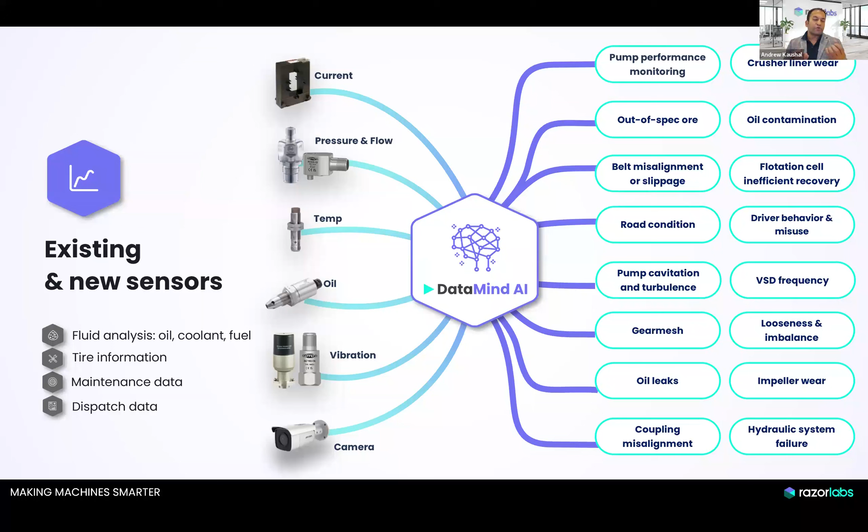Sure. So we can give an example of a mill to start with. The mill is obviously critical in many operations, from gold to copper and other precious metals.

Going through this, you can see here one of the screens of the system. The mill is such a huge machine that when you're in a long shutdown, you need to slowly rotate it. You can see here one of the severity scores the system is giving specifically to the motor of the mill, and you can see the different components.

You can see here that after a while, they had a long shutdown on site, about a month and a half. Unfortunately, during this shutdown, they forgot to rotate the mill, and the weight of the mill caused damage to the bearings. These black dots are when the mill was down. When it went back into operation, you can see it already started orange, quickly deteriorating to red.

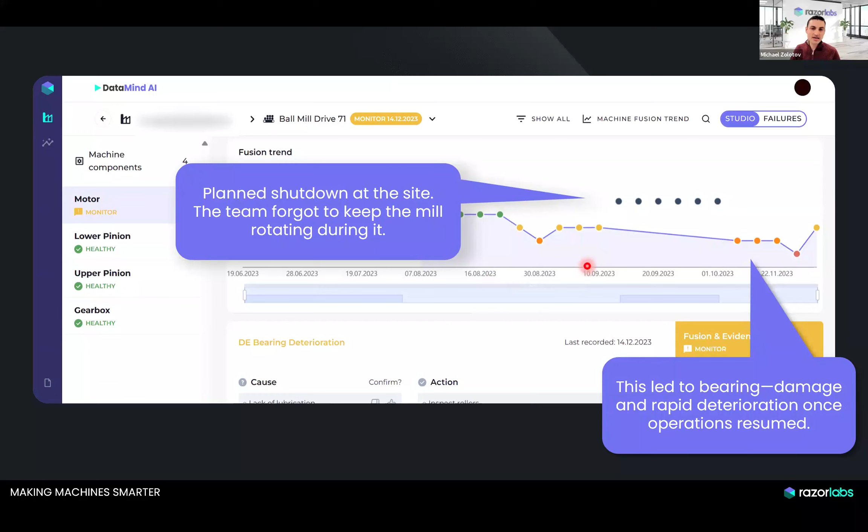So the team had real-time indication that something was wrong right after the shutdown, and it was actually deteriorating. Now, it's not a black box. It's not only giving the exact diagnosis of the DE bearing deterioration, with the causes and the action, but it's actually showing the reliability team on site what the evidence is.

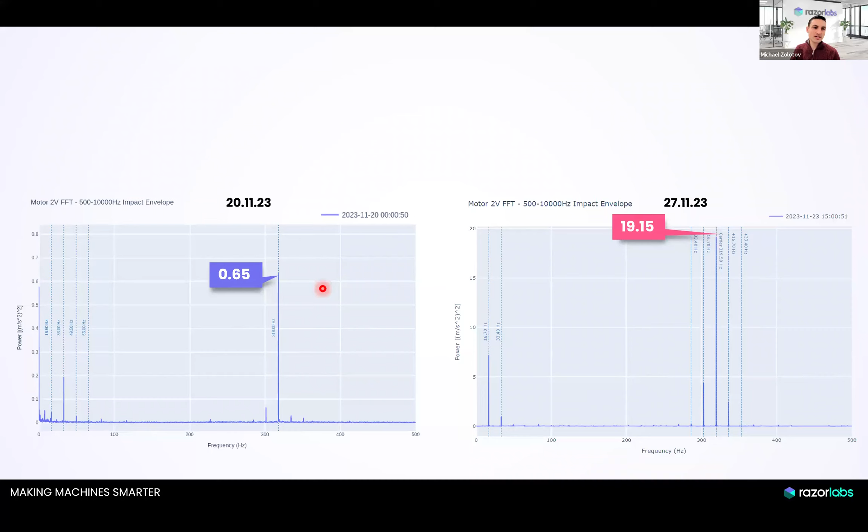It shows that within one week, roughly a year ago, they had a deterioration of 40 times in a specific frequency. This is a very apparent deterioration in a specific frequency that indicates specifically the outer race deterioration of that bearing. The team on site, understanding this is a very large machine, wanted to be sure.

So they sent their own team to do regular vibration analysis, and this is the signal that their own team got. You can see immediately the difference between our signal, which is the fusion of vibration, motor current, tachometer and other sensors, versus just a regular single sensor vibration reading in this case.

When you try to compare the blue to the red, trying to understand if it deteriorated, these are also one week apart. You don't see any deterioration here, right? Sometimes the blue is higher, sometimes the red is higher. You don't see any deterioration. Obviously it's not as clear as the super clear signal you get when fusing sensors together.

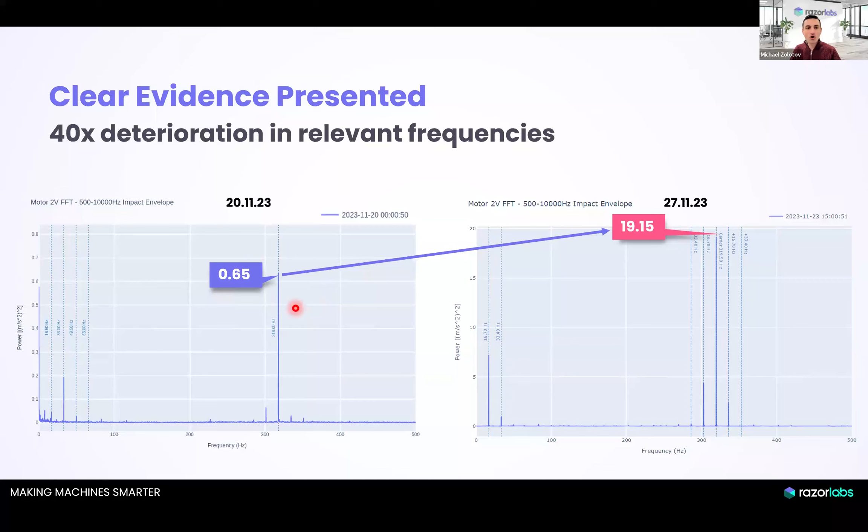So here we fused vibration sensors together with motor current and tachometer, all with sophisticated algorithms we're going to discuss. Basically, they didn't see anything with a single vibration sensor, and they took our word for it.

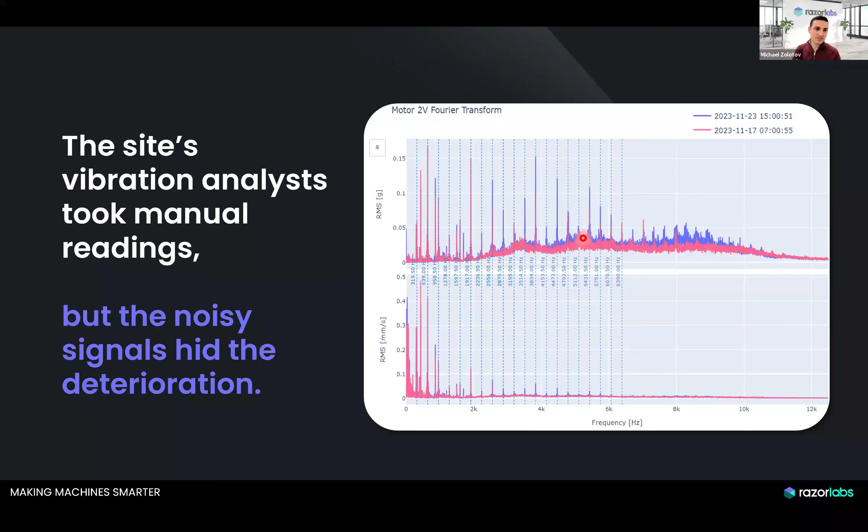They had a shutdown two weeks afterwards and reshuffled the tasks in order to take care of the mill and replace the motor. When they took apart the old motor and the bearing, they saw this severe damage that would otherwise have cost at least a day of a shutdown, probably a few days.

So we're thinking here of at least 24 hours of avoided unplanned downtime. Obviously, a mill has no redundancy on these kinds of sites.

Exactly, and it builds trust. So when the site sees this kind of foresight, adoption is much easier. It's not just a cool alert, it's serious business value.

So could you tell me what that saved the site? From our estimations and the site's estimations, it would be at least $500,000. It's a huge machine, you actually need to bring a crane in the middle of the night and pay after hours. The failure would have happened around Christmas, so really a nightmare.

Both looking at potential lost throughput, because that part of the line would be down again for at least a day, probably a few days, but also increased maintenance costs, increased labor, and overtime of the contractors. And imagine this is one mill, one failure in a single site. Now imagine multiplying this by many failures across a fleet of machines and across a group of sites. The potential here is really enormous.

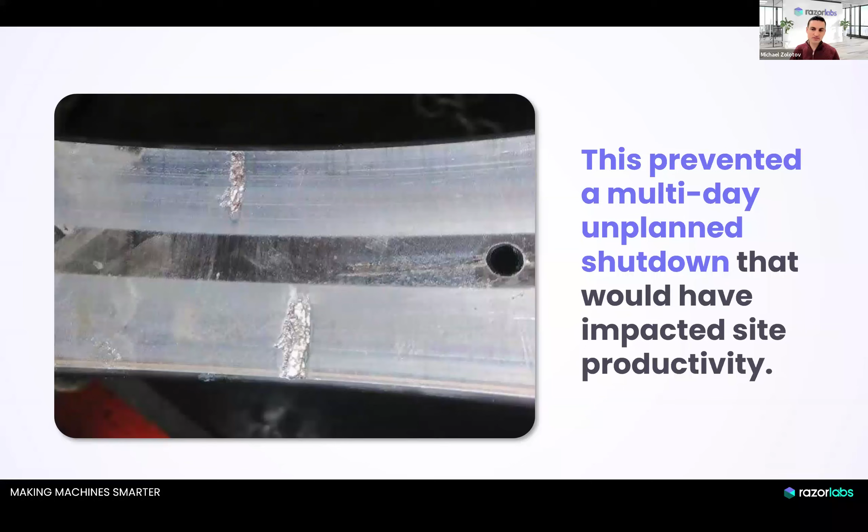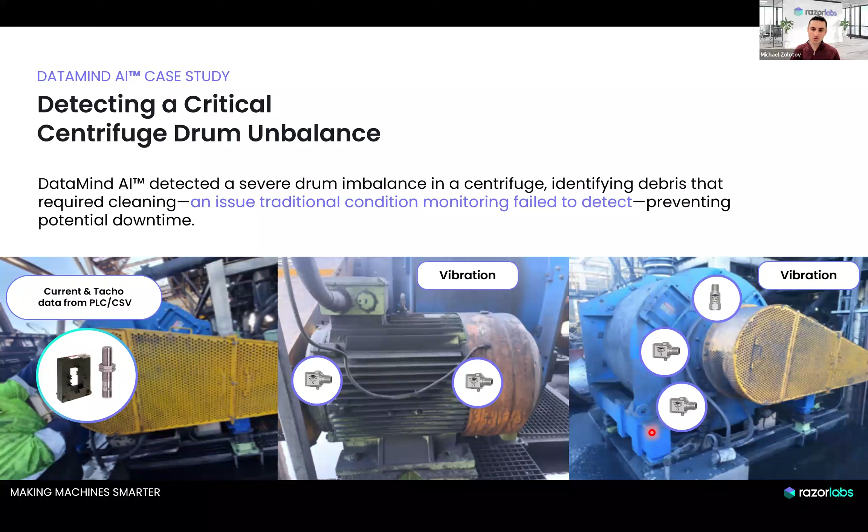One of the key facts about a centrifuge is that after you perform maintenance on it, after it has been down, it's critical to clean it from debris and residue that can settle on the walls of the drum of the centrifuge. In this case, they skipped the cleaning, and you can see already that after the maintenance was done, they went immediately to alarm because that debris and residue basically made the machine highly imbalanced.

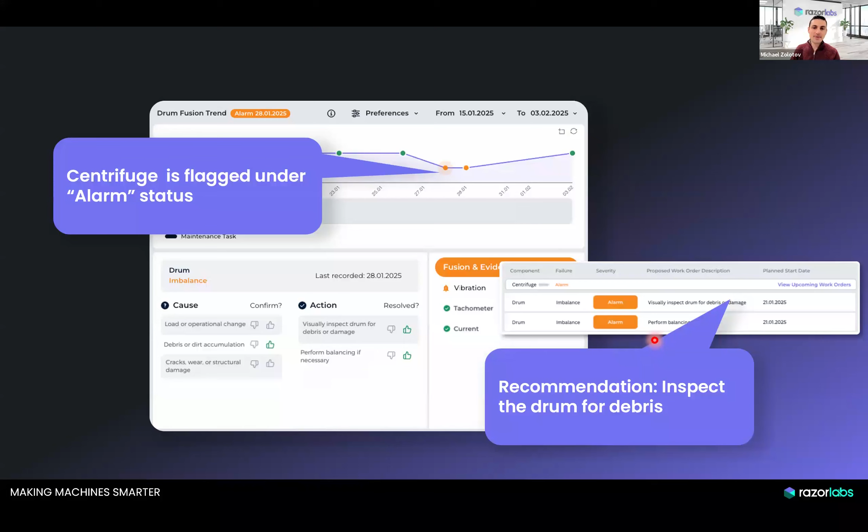The drum itself was highly imbalanced, and you can see here the diagnosis, which includes imbalance as a failure mode. There is a deep root cause analysis showing exactly what are the potential causes for such a machine and such a signal, and what actions are recommended. Within the planning section, they can see the proposed work order, and the notification can be automatically generated based on this condition.

Looking at the data from a time series perspective, you can really see the normal operation here. That's all a screenshot from within the system. Right after the maintenance, you can see a spike. The entire baseline of the vibration became dramatically higher, by at least 2-3 times.

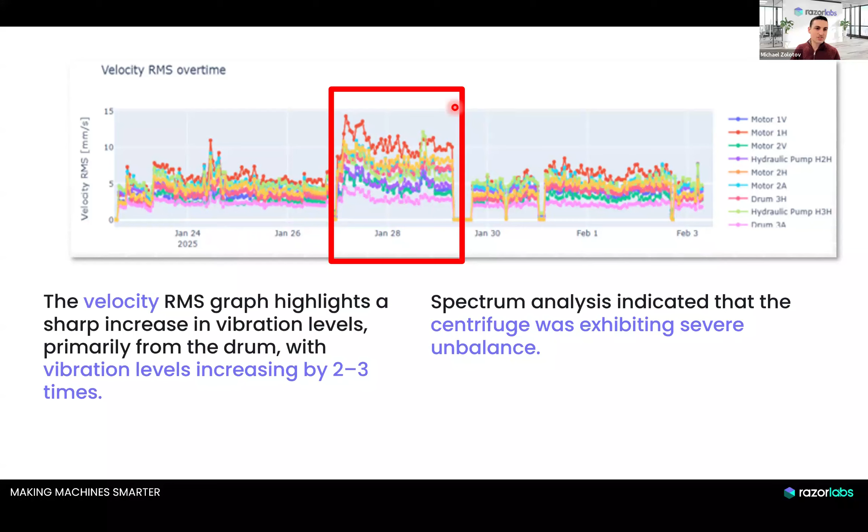What is amazing to see here is that from that point, they knew about it literally that day. With other systems, or with vibration analysts checking on site every 6 or 8 weeks, it would take a much longer period of time. The issue was actually resolved within literally 2 days. You can see how already on January 29th, it was completely resolved.

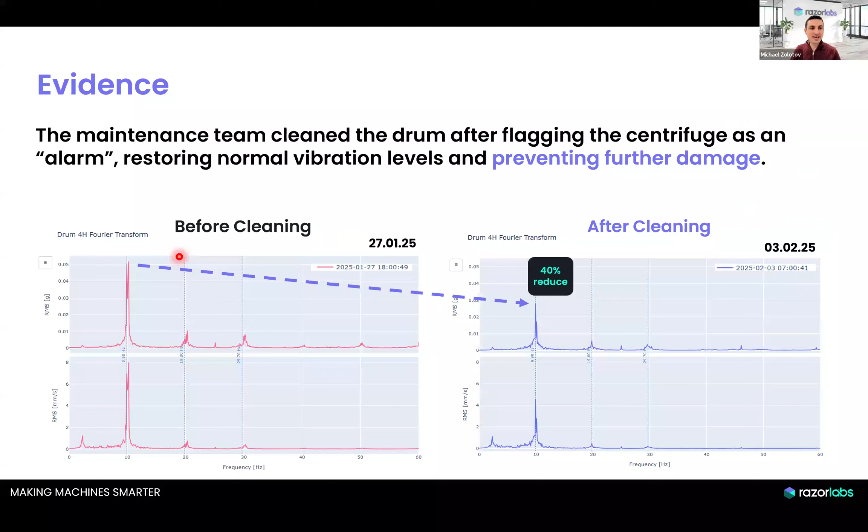From a spectral perspective, we're using the vibration to exactly identify the failure mode itself, and verify after the cleaning that it went back to normal operations. Indeed, within the dashboard, after normal operation, it went to orange after the initial bad maintenance, and after they fixed it, real-time indication shows they're now back to normal, also giving them a measure of the efficiency of the maintenance itself.

Again, what is amazing to see here is that an issue that could have been overlooked for months or even more had been resolved within 2 days. So an online system using the various sensors of the centrifuge just gave them the heads up right on that same day. They reshuffled the tasks they had in the downtime, 2 days from that point, and went back to green.

And by the way, here it's not only the shortening, or potential shortening, of the life of the centrifuge that did not happen because it was resolved pretty quickly. This residue also reduces the efficiency of the centrifuge, it reduces its effectiveness. Again, instead of lasting for months or more, it was resolved in 2 days.

So what I'm understanding is it's not just machine diagnosis, but also identifying poor maintenance and giving site leadership better control. Plus, machine life gets extended, meaning lower maintenance cost and fewer component replacements on site.

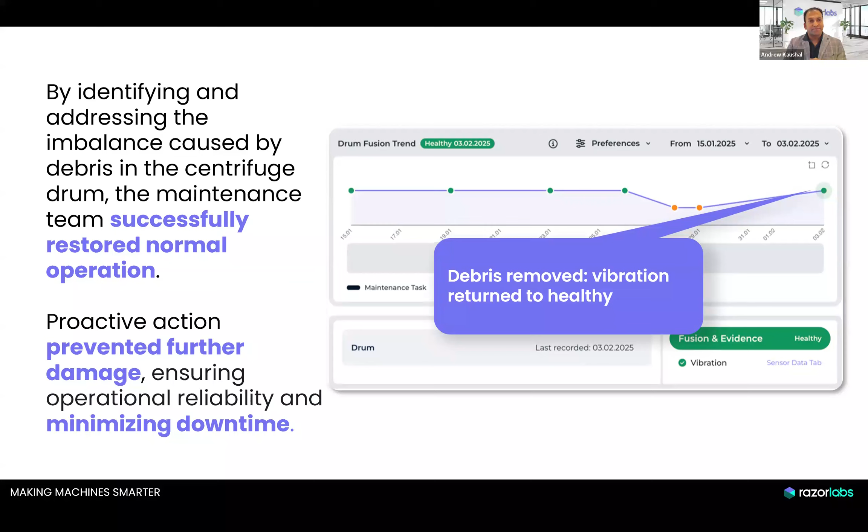Sure, fantastic. So let's speak about the AI under the hood here and how it actually works. First of all, a major differentiation is that traditional AI, or older AI, requires tens of thousands or even hundreds of thousands of examples of failures, or whatever you're trying to teach it. We see systems coming to site and requesting the site to actually train the system, calibrate the system, for a prolonged period of time, of at least half a year, even a year and more, because their traditional AI is learning by these examples, and it puts a huge burden on teams that are already overworked on site to also start training their AI systems.

We don't think that really fits the mining industry, so we've built a very different approach to training these models. The key differentiation here is that this AI is pre-trained. All the knowledge required for the diagnosis of the failure modes, of the root causes, of what actions to take, it all comes pre-built into the AI. And after all the sensors are there, literally within a few days, it's up and running.

If any sensors are missing, literally after we walk out of the site, deploying the gaps of the sensors, in a few days the system is up and running, and it does not require the site team any training or any teaching.

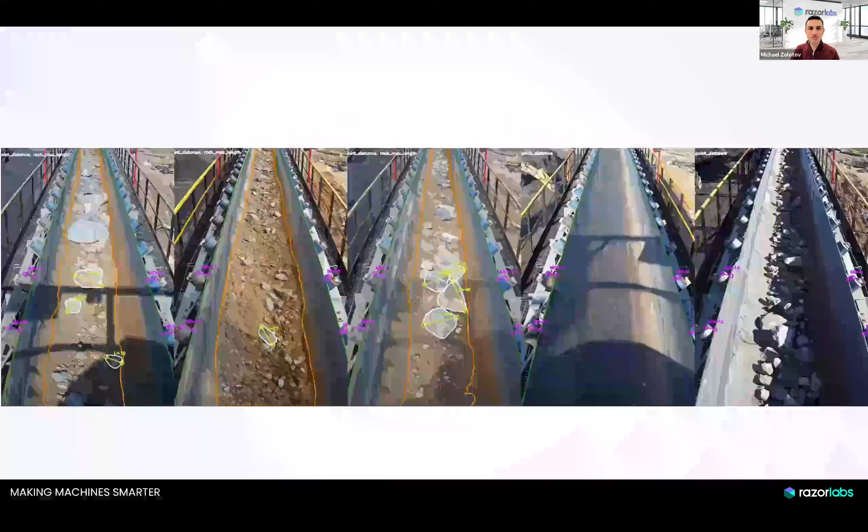Fantastic, so it's a very good question. And I think that what's very unique about cameras is that they might be the only sensor that actually allows us to look at the material itself.

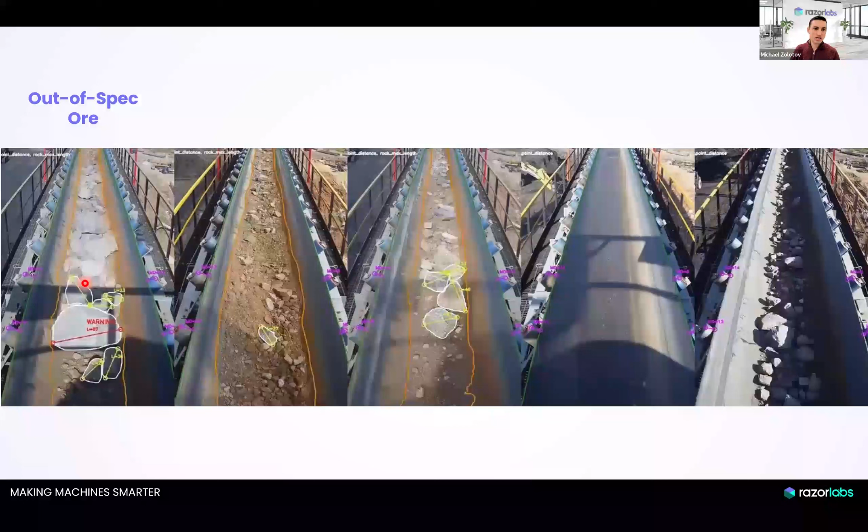So one use case is conveyors. We can go from left to right here, but for example, looking at out-of-spec ore is critical to diagnose crusher liner wear or a miscalibrated crusher gap.

Belt misalignment - you can see here that we're measuring the distance from the tips of the belt to the tips of the rollers to make sure that the belt is aligned. Misaligned belt can go unnoticed for months. It's actually reducing the life of the belt, increasing the amount of belt replacements that are done, and also reduces the life of the pulleys of the belt.

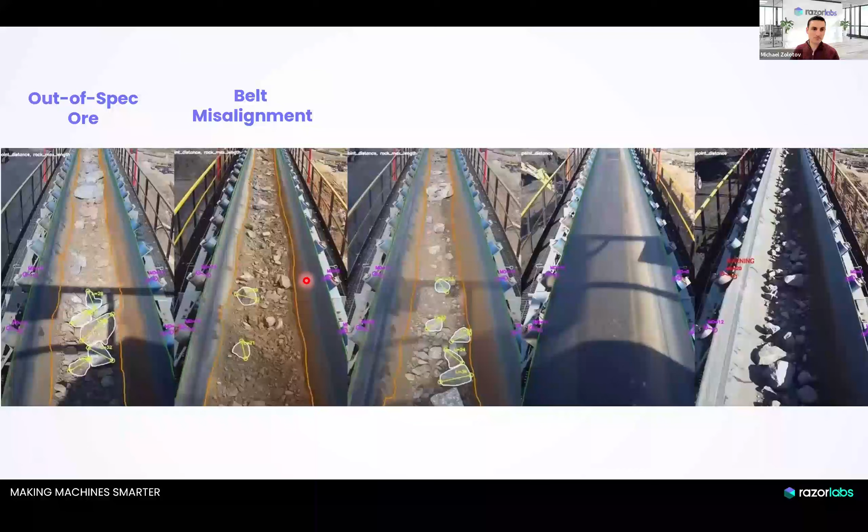Variations of volume, which are very important before grinding circuits, right, in the feed to mills, for example, because they make the grinding less efficient. Blockages and rips of the belt, as you can see here on the right side.

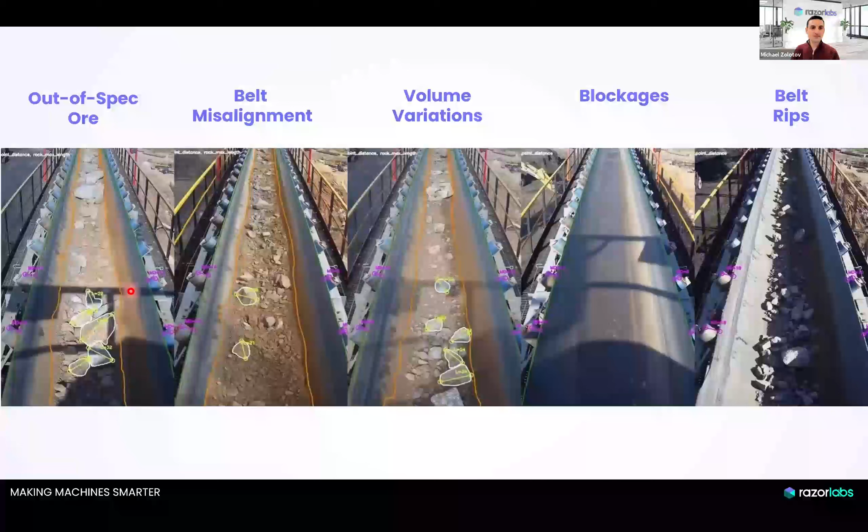And basically what the deep learning does is it takes raw pixels, a bit like we've seen in the previous slide, and out of these raw pixels, it measures specific parameters. So for example, if we're looking at oversize, it's measuring every rock. It knows what should be the crusher gap, and it's trending the oversize. So basically the AI models convert the raw pixels into clear operational metrics, alignment of the belts, oversized.

And once these are trended, you can basically start setting alarms based on them. So you can see here how in one of the sites, every time they have an increase of the oversize, they know that their crusher liners are worn out, and they basically go ahead and proactively fix the issues. Before we installed the system, it actually caused them downtime in their mill. The mill was getting oversized material and it was actually tripping on overload. Since we installed the system a few years ago, they just haven't had it since.

Same also goes for flotation cells. I'm not sure that you're seeing the video here, but basically measuring the size of the bubbles, the velocity and distribution of the bubbles, which gives a real-time indication of the efficiency of recovery, whether it's in gold sites or other precious metals.

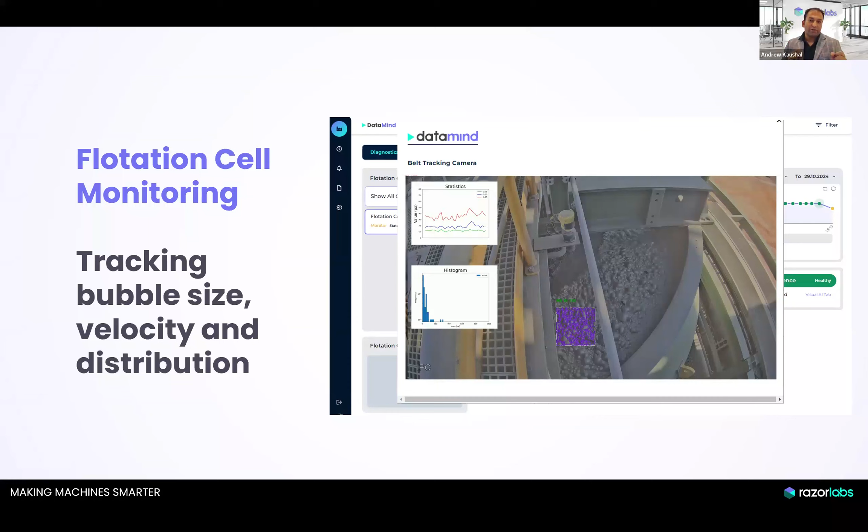So I imagine this adds a whole new layer of visibility, especially for process-related faults. And this adds a great point - most sensors don't capture what's actually happening with the material. So it's like having a thousand sets of eyes, 24/7.

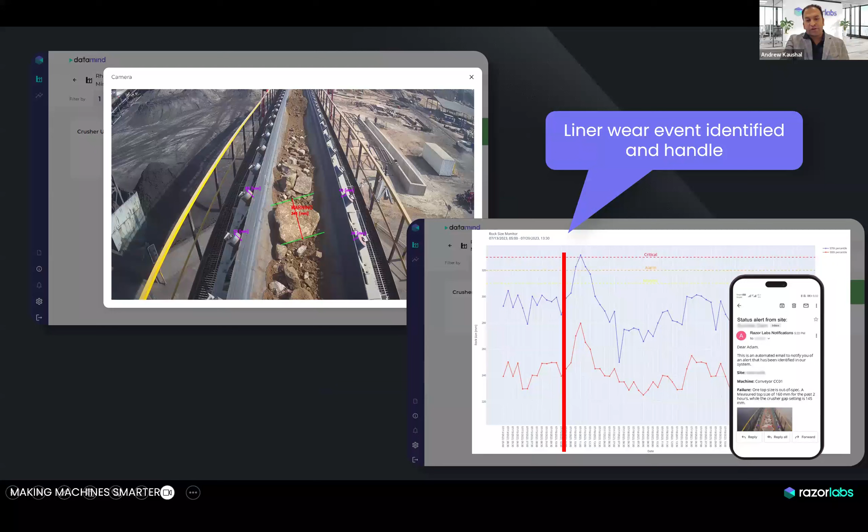Correct. So if I go to the next, it's covering more on the machine side and what equipment is actually covered and what's in the scope on the fixed asset side of things.

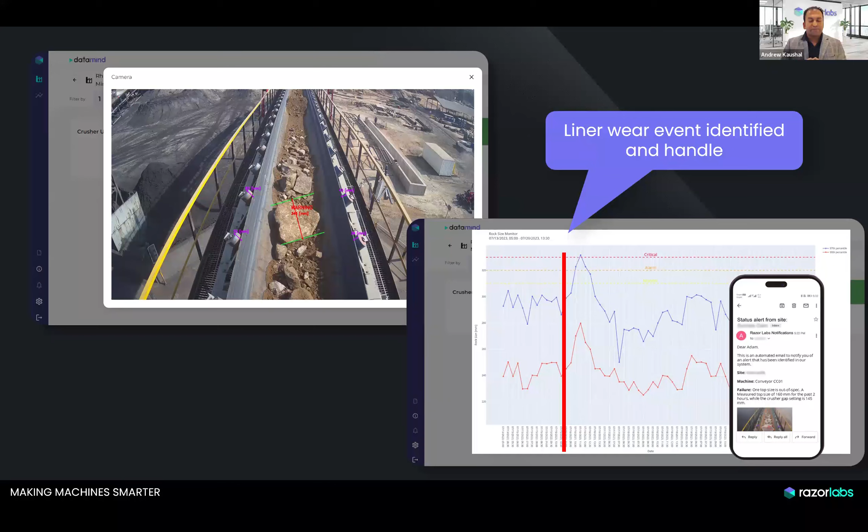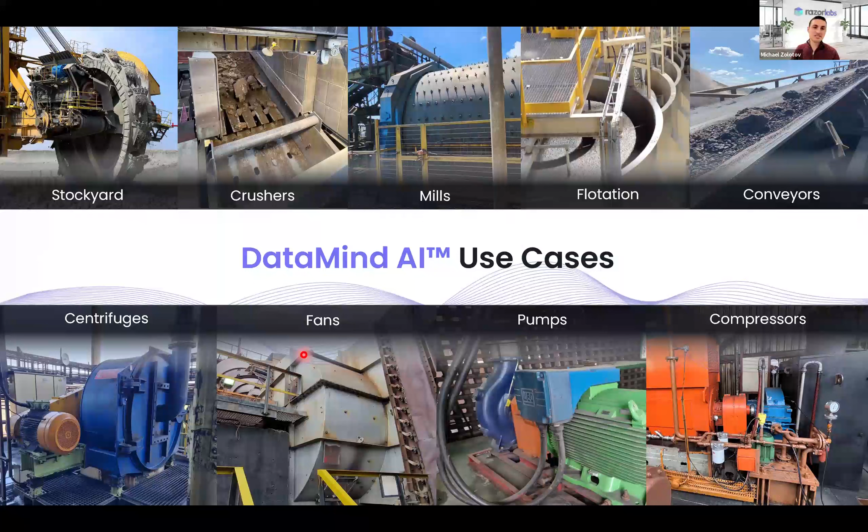Sure. So taking just some of the major examples, we support basically all fixed assets, really from reclaimers and stackers and ship loaders to crushers in the crushing circuit, from jaw crushers to cone and gyratory crushers, ball mills, sag mills, AG mills, flotation cells like we've seen, obviously all conveyors, both in booms of the material handling, but also yard conveyors and so on. Centrifuges that we've seen, fans, ID fans, FD fans, sinter fans, which are common in smelters. It's not only mines, it's obviously also wash plants and processing plants, smelting facilities, refineries, pumps and compressors.

We are also covering mobile fleet, but that's a subject for a different webinar.

Totally understand that. Just to understand this a little bit more - what about the integration to work order systems already in place, like SAP? How do we leverage the existing systems of the mining sites?

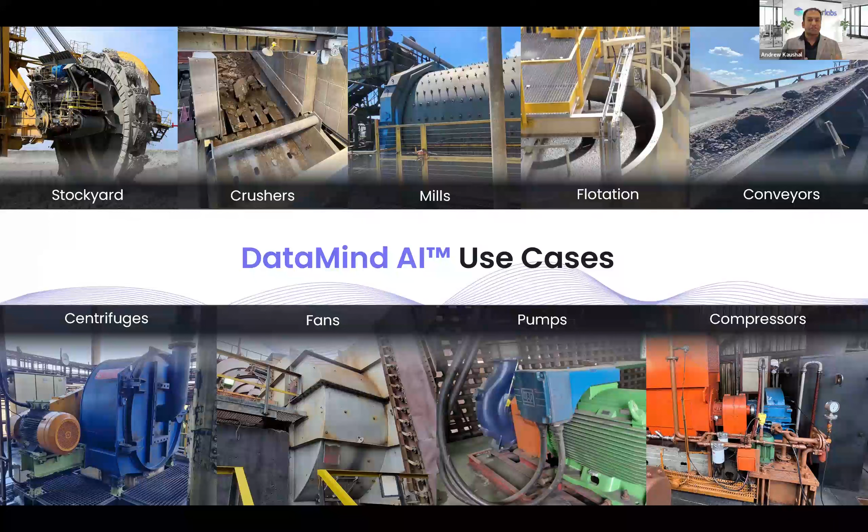That's a very good question. And basically, we integrate both to SAP or other ERP systems for two main purposes. One is to get work orders and understand what maintenance is done on site. And the other one is to create automatically maintenance notifications based on what is right now deteriorating. It's basically closing the loop from monitoring the equipment to making sure that the actions are really happening. We've been partners of SAP for the past 3 years.

Basically, when a work order is received, what the system does - I've given here a real example of one of the compressors that we're monitoring at a site in New South Wales. What happened here is that they performed lubrication. The way that we know that they performed lubrication is that we integrated to SAP and got the work orders. But we can see that after the lubrication, not only was it not effective, but it actually became worse. So the system itself is actually taking the work orders and correlating them with the health of the machine, and it anticipates to see improvement in the health.

If it's not happening, then we can take it a step forward and proactively inform the site that this maintenance was not done effectively. In this case, according to the OEM instructions, they needed to lubricate between 30 and 40 grams of grease, and they actually only put in 10. The only way to know about it is to integrate to SAP, get a work order, understand that the team on site performed maintenance, and see that it was not effective because the AI sensor fusion is diagnosing the equipment - it's actually seeing it not improving because of the maintenance. And then the team on site can be instructed to put in the proper amount of lubrication.

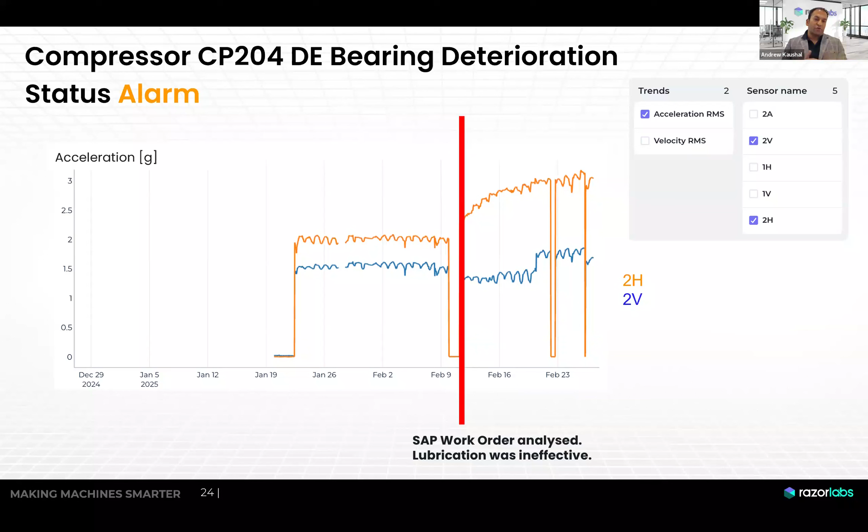Michael, as we know, mining isn't Silicon Valley. These are tough environments. How do we make the implementation work? Can you talk about that? Sure. So we really built a clear methodology on how to do it. We really keep it simple and short.

First of all, we actually come to site for a site survey where we map the critical equipment. We map the single point of failure, where when some machine stops along this line, the entire line stops. And we basically choose the critical equipment. It can be the crushers, the conveyors, it can be some critical part that is in charge of a main line of slurry and so on.

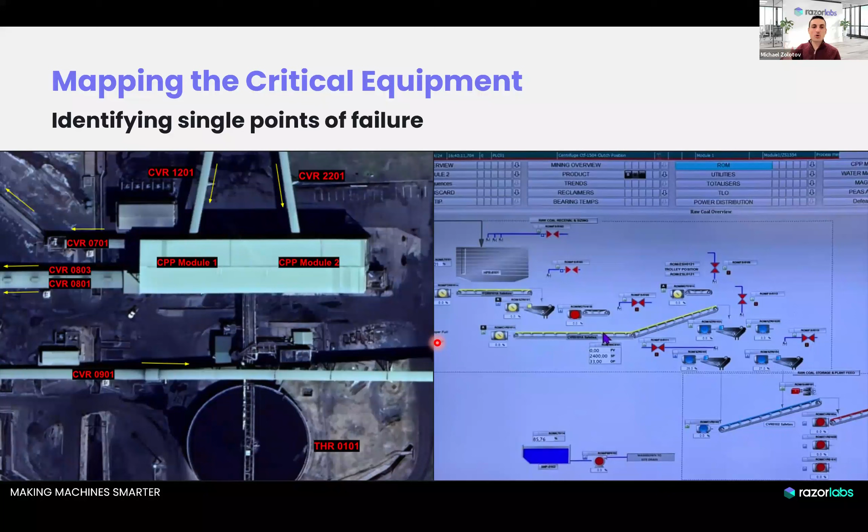And we send our local teams. We have local teams obviously in Australia that come to site and choose, together with the client, these critical machines. They also see what sensors are available because, as I said, any sensor that's available and relevant for diagnosis, we use. We have a clear methodology where we know what sensor is required, in what location, and for what purpose.

And in any place where sensors are missing, we're building a very clear implementation plan saying what sensors will be added in what exact locations, down to their exact orientation on the machine, because different failure modes will result in, for example, vibration on different axes. So the team on site has a very clear understanding of where new sensors will be deployed.

And once the sensors are deployed, we basically walk out of the site and the system is up and running. It's getting all the data, both from our sensors and the existing sensors on site, analyzes it, and gives a diagnosis 24/7 for all of the machines that are monitored on site. And our local Australian teams provide ongoing support for the site with any questions they have. Fantastic.

Michael, I have traveled to a number of sites here across Australia, and one of the most common questions I hear is: what makes Razor Labs different from every other condition monitoring tool? I'd like to hear your thoughts.

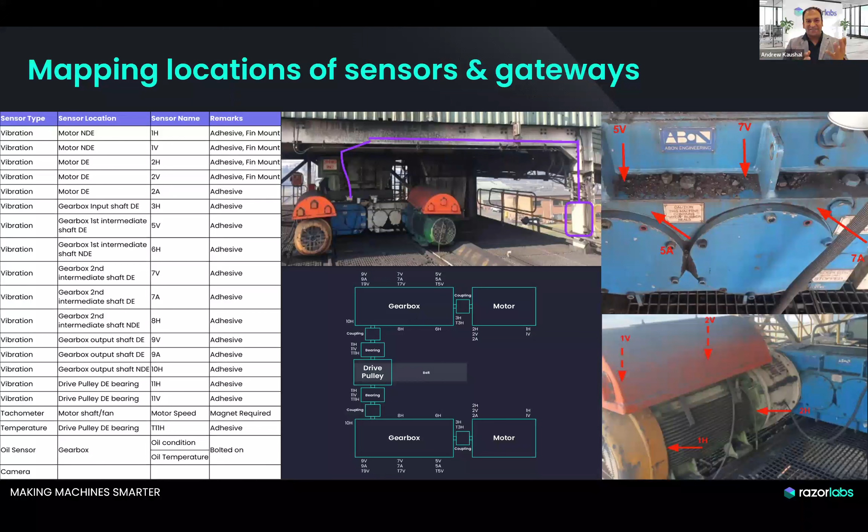Sure. So our differentiation is that other tools mostly offer dashboards with tons of graphs, tons of raw data that the sites need to analyze by themselves. What we provide is kind of a set of automated doctors looking at your equipment 24/7, not missing any failures. That's what the AI sensor fusion, which is very unique here, is delivering.

Now, instead of giving some vague alert like your temperature here is above 80 degrees, and thousands and thousands of false alarms, like any user of SCADA knows about, we're telling you exactly what the failure mode is, what the root cause is, and what needs to be done.

And in order to do it, under the hood, we use sensors that others don't use, like cameras, like unique oil sensors that give you minute-by-minute oil readings, unlike laboratory tests, which are only once every month or every 6 to 8 weeks. So the sensor fusion, both the hardware part and the diagnostics part, is very unique. The training methods we've put here are very unique too, so the site team doesn't need to train and teach the system. It's not required here at all.

And we've built some sophisticated techniques because mining machines are so noisy, right? They're grinding, they're crushing, and this noise is much higher than the noise of the failures. A bearing like that produces dramatically less noise than a huge mill. And we've built algorithms like envelope demodulation and other vibration analysis processing algorithms to cut through the noise, reduce it dramatically, and be able to see failures.